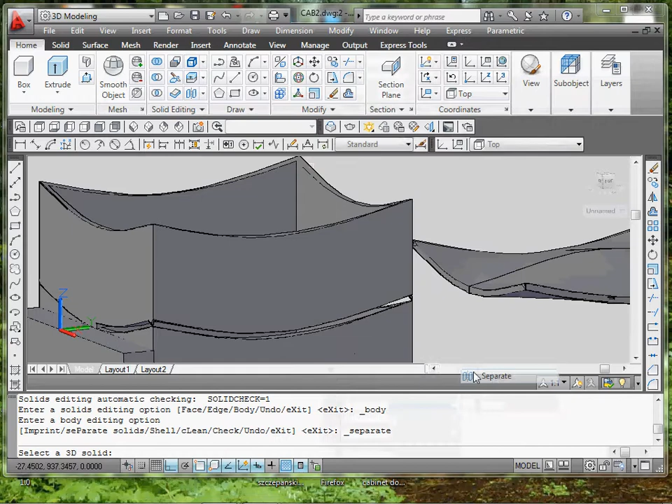That I managed to cut it over here. All I have to do is just use the separate command, go over here, separate, just like that. It should separate into two pieces, which it did.

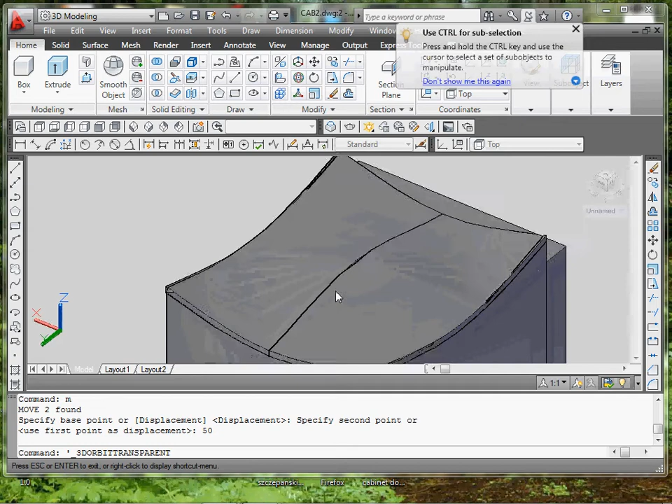I delete it, and I have something like this, which you guys already figured out. Once you have that, you put in the drawer or door you already have completed, and move it back into position. Hopefully you remember what distance.

And I have myself a new custom cabinet. The next step for this would be, if you guys want, you can add shelves, or what we can do is do the door handles. So to do the door handles, I already have some done over here.

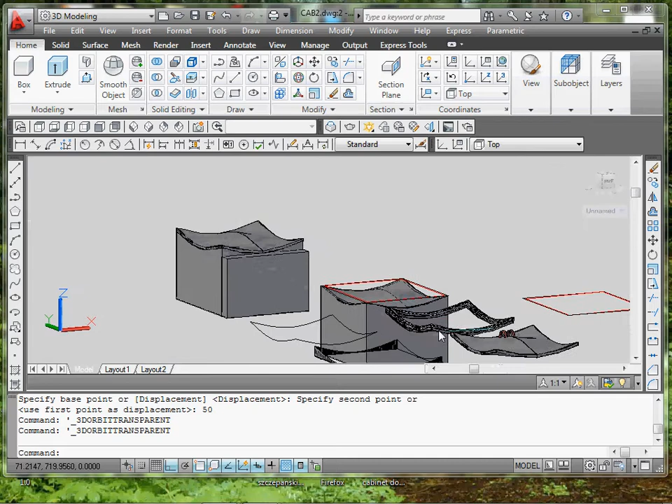I'm just gonna make new ones right now. What we need to do is go to the top view first, figure out how big the handle we want. So I'm gonna draw a rectangle, about 2 inches wide by 4 inches deep, high.

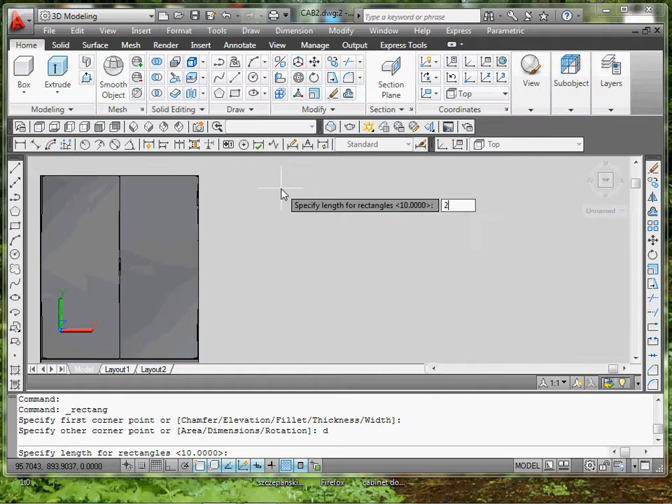So I go rectangle, D, enter, 2 by 4.5. It's really up to you. Make it as big or as small as you want, as long as it works. It can be just a doorknob, for all I care. But that's my rectangle. I'm going to use that as a reference to drawing my handle.

I'm going to explode this to work with it. So I go explode, select the object, explode it.

What I'm going to do next is offset, or type in the distance of the thickness of the actual handle. In this case I used 1/4 inch, or an eighth. Offset 1/4 inch, and I'm going to trace over these two rectangles at the end again.

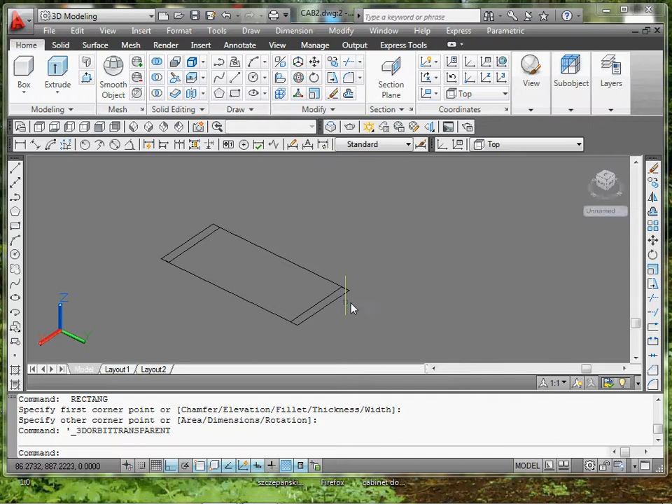So I do have my two solids. I'm going to be lofting from one to the other using a path. All I need to do next is just draw that path. To do that, I'm just going to do what we did with the cabinet.

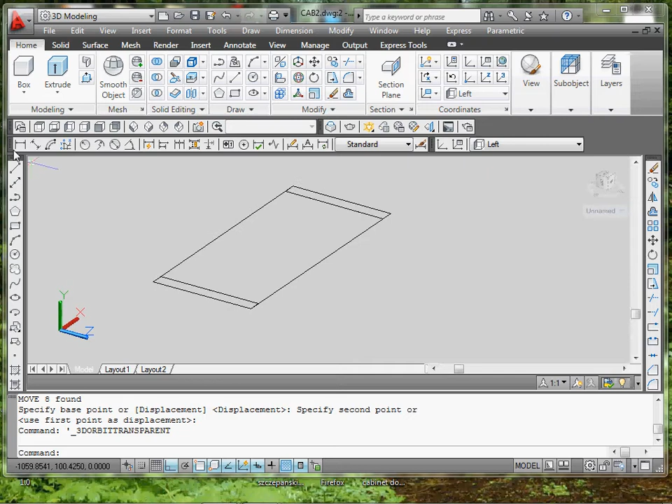I'm going to just move this over so you guys can see it better. I'm going to change my UCS to view it from a left view so I can work easily and establish points of my actual line path that we're going to be using.

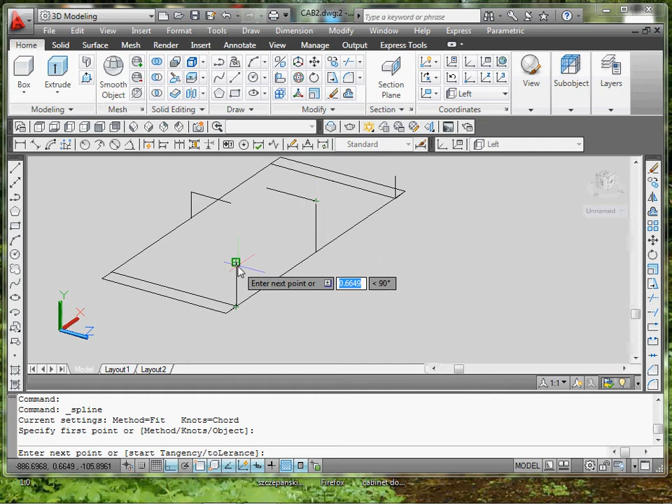So I'm going to actually do both sides. Yeah, that's about fine. Going to use a spline. Start from here, go here, go here, go here. And I'm just going to modify that a little bit by offsetting this point.

There's one line. And I'm going to use another spline, and just do a simple one on this side.

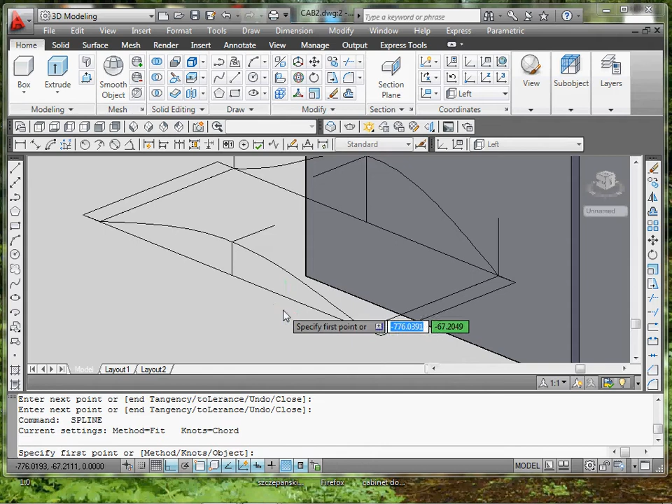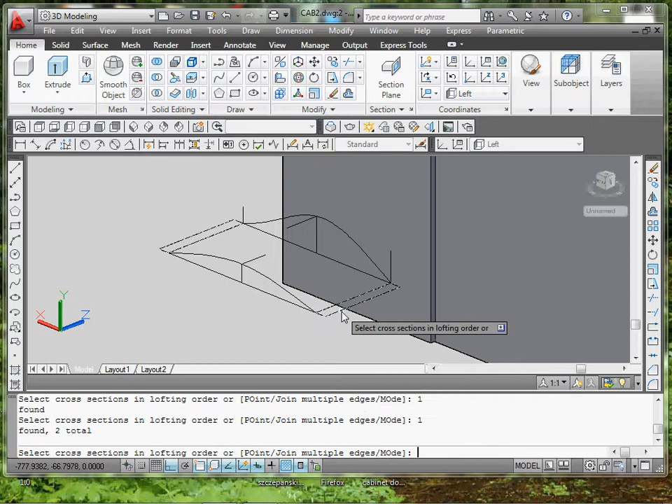Next step is I just need to loft this solid piece to this solid piece. Since there's a line still there, do a blue box and delete it out. Again, loft this to this, enter, guides. There we go. And that's my actual handle.

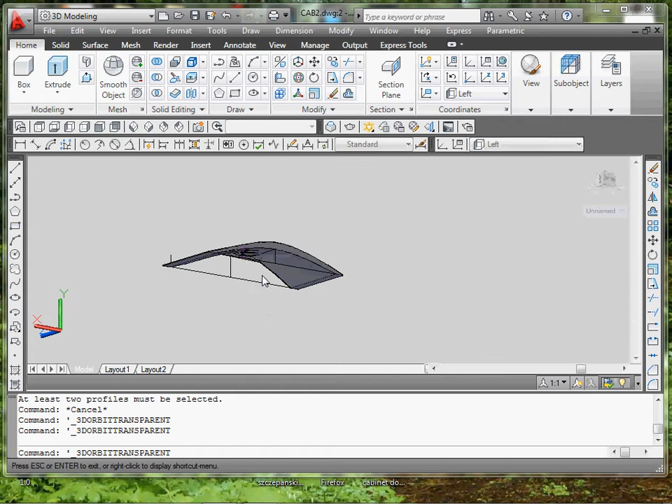It looks kind of dull, flat, not that interesting. I'm going to need to actually extend these endpoints to be extruded out so I can put my fingers underneath. So I can do that right now by going to modify, extrude faces. There we go.

Select this face. Oops, extrude this face, I think I selected it. There we go, and type a distance about that. That didn't work. Alright, do one at a time.

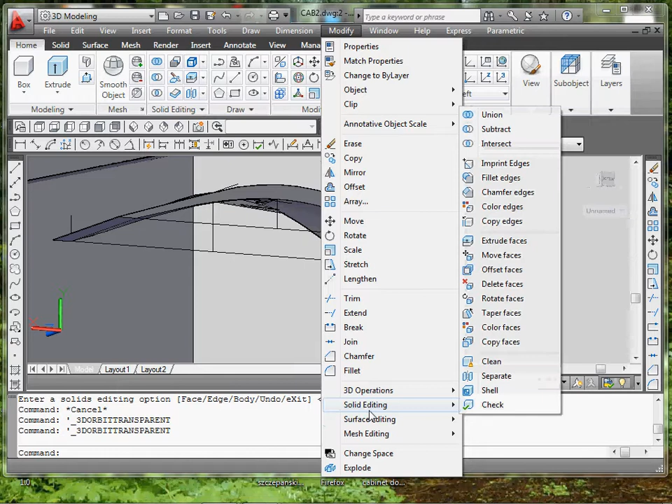Modify solid editing, extrude face. There we go, I'll show type of distance so I can figure it out later. Yeah, you learn from your best mistakes. So select that, enter.

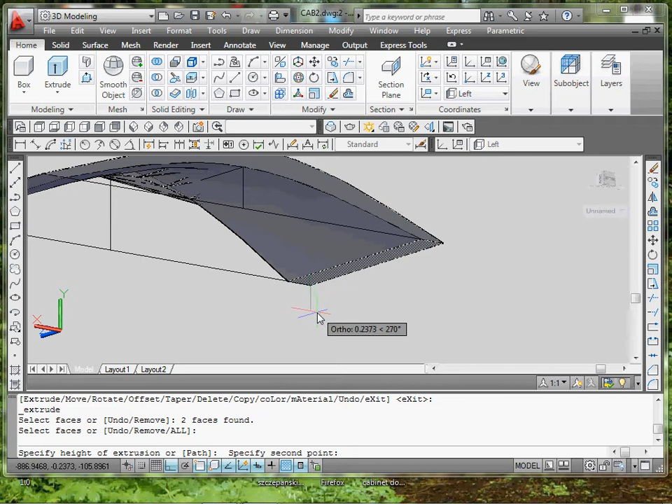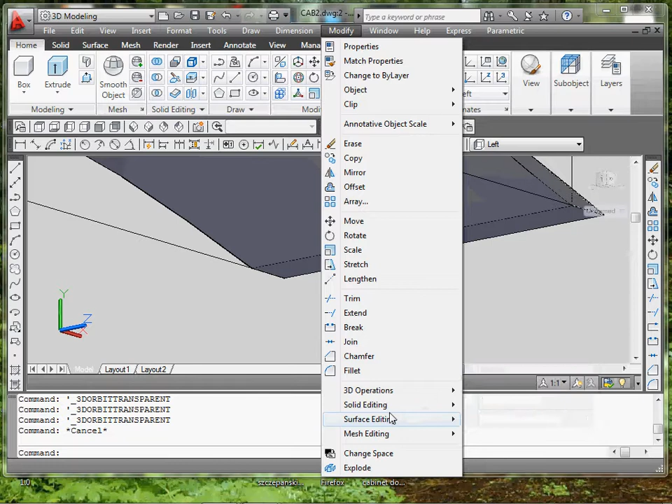So 0.25. And same thing over here. Modify extrude faces. Nope, it's not letting me select it. Let's see if I can get it on the other side. So I can extrude faces. There we go, 0.25.

So I got myself a little better handle. I can put my fingers underneath. But this part isn't as wavy as much as I wanted it to be. So what I can do is, I should have done this before I actually did the handle.

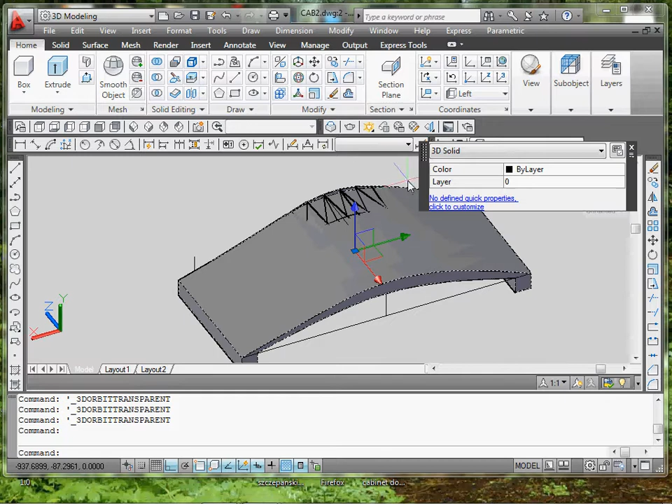That's okay, I'll keep this and I'll make a separate one. I'll work from this one. I'm gonna actually explode it. I should have done this part before, but that's okay.

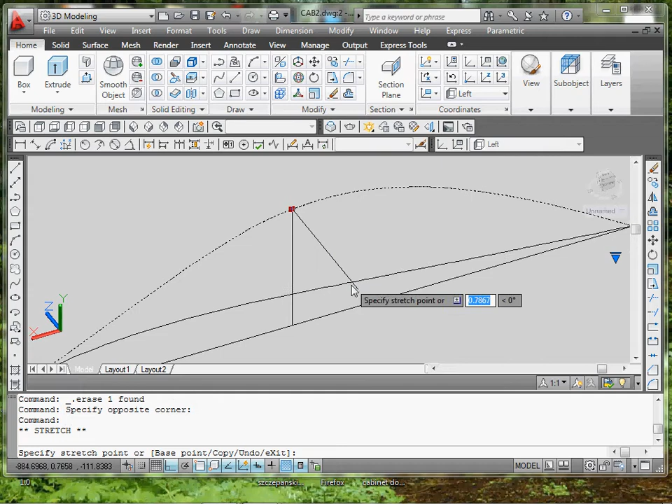And I'm gonna move these over. So this one's gonna be a little bit inward, and this one's gonna be a little bit inward also. I'm gonna make it a little bit easier to grab and more interesting looking.

So again, oh geez, I'm missing the... gotta draw in the rectangle since I lost those. That's an easy fix. That's a 1, 2.

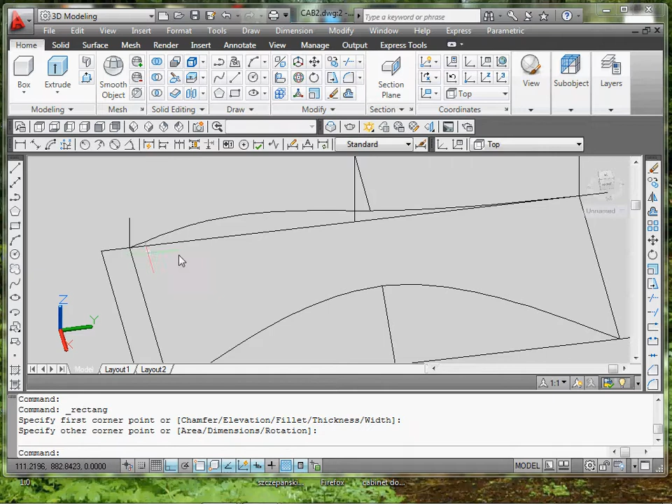There we go. I should make a copy of these so I can extrude them down later instead of using extrude face. So I'm gonna copy these about 5 inches.

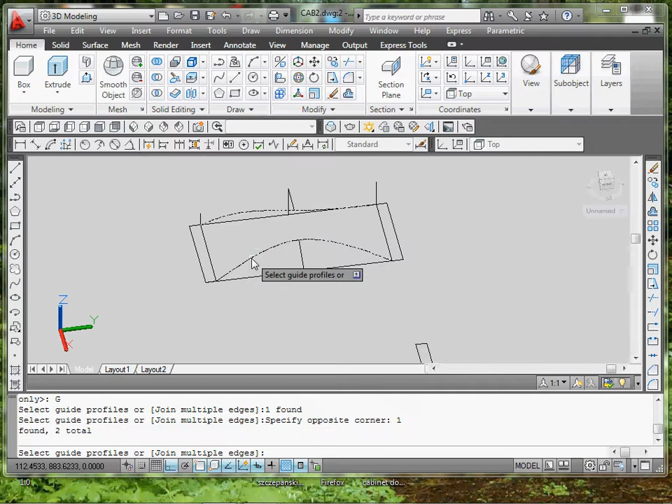There we go. Lofting the solid to solid using my new guides, which is this one and this one. There we go. And I'm gonna move these back, or actually extrude them out now, going downwards by 0.25, moving back 5 inches. And I got myself a completely new design of a handle.

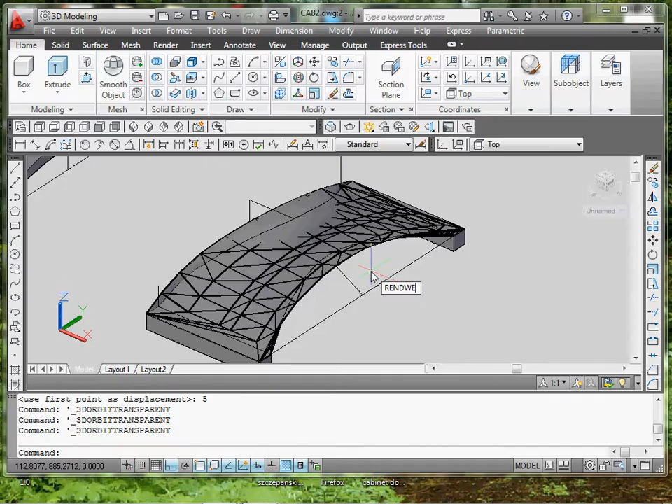The hatching is just reference, I wouldn't worry too much about it. If I render it, it should come out better. Let's see, this is going to be my new handle, that's my old handle. And it comes thin, but that's okay because it's sheet metal, so it's fine. And that's my actual new piece of door handle, which is pretty cool in design.

I can union the bottom pieces to it, which I created, like so. Oops, that was a little weird.

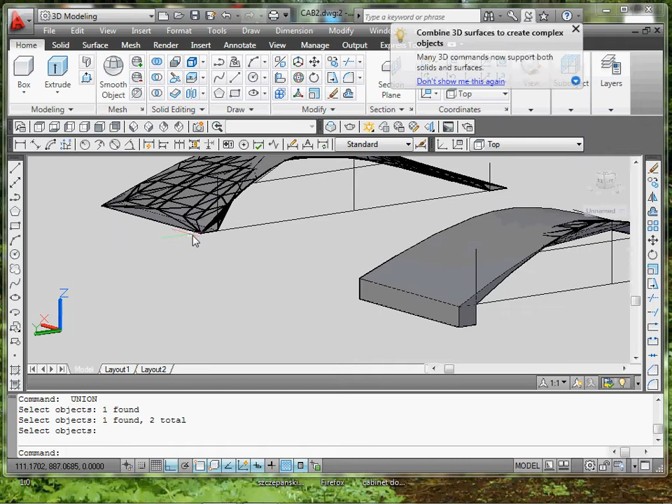That is completely weird, not quite sure why it's doing that. Makes no sense whatsoever. Guess I can try extruding the face. It's not normal. Subtracting instead of adding.

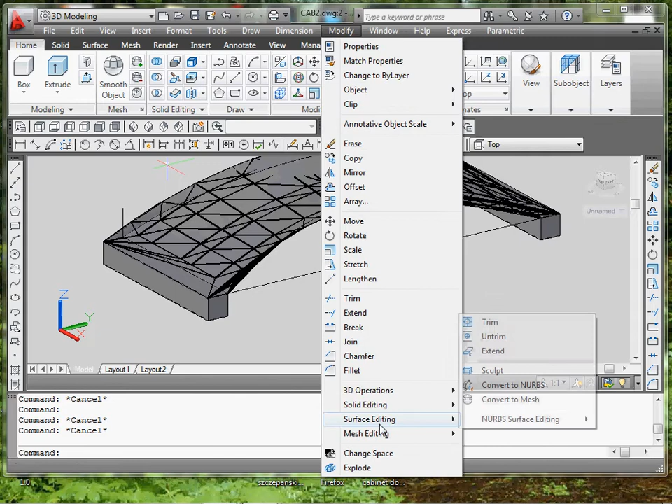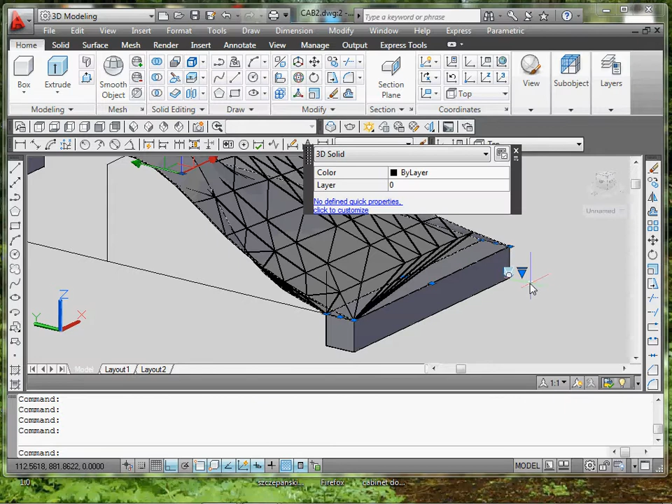Let's see if I can fix this up a little. That's okay. Move this up maybe a little. Fix it.

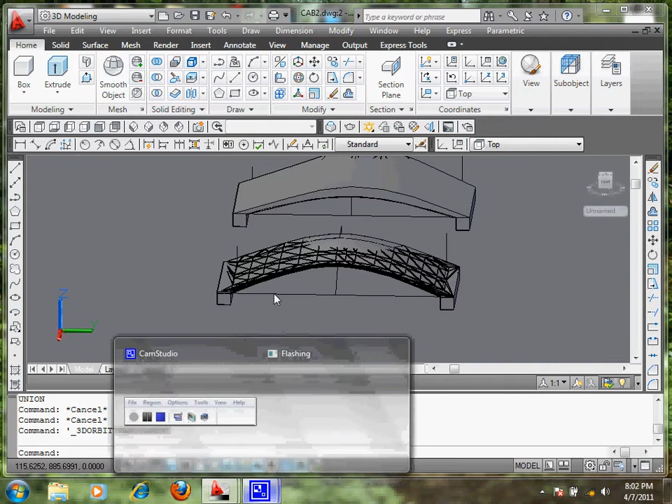Oh, let me just pause this. So I got it to be one piece. Now I just gotta move it into my door.

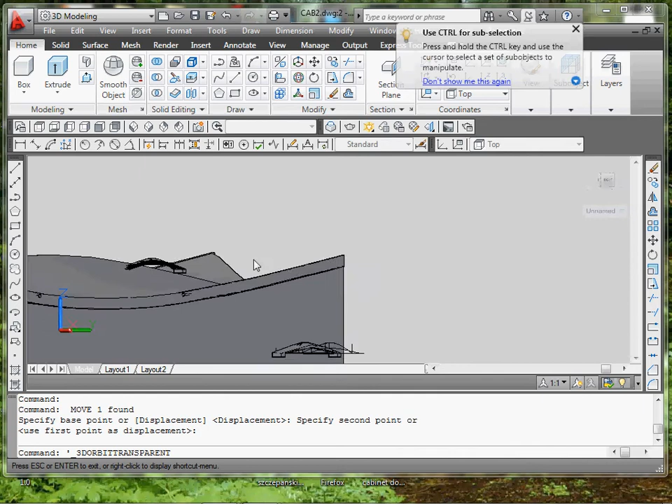And position it, and if I need to I can extrude it out the bottom piece to fit perfectly onto my piece, or I can do a 3D rotate from a specific point.

Oh, that wasn't it. Perfect, okay let's try it again. Select that object, 3D rotate. There we go.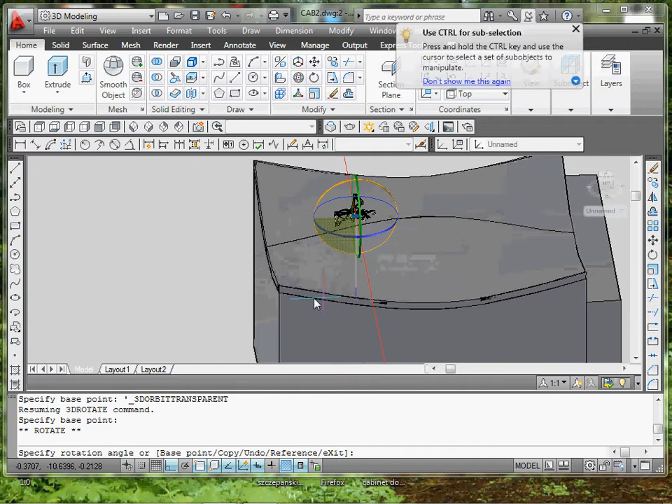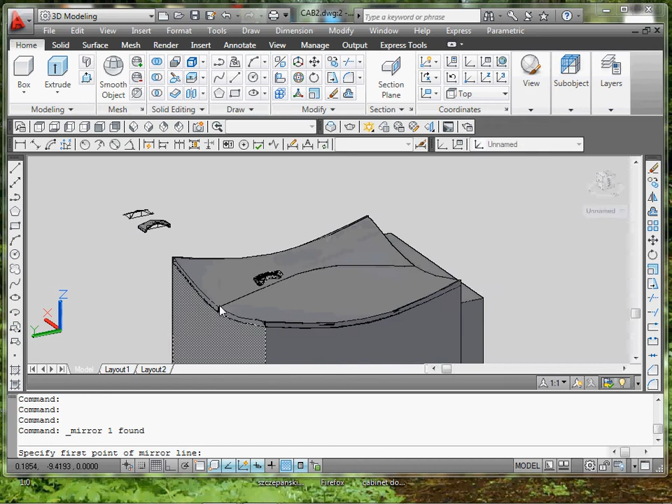Let's turn off all these so I can actually get it to the perfect angle. So something like that. There we go. And just make a mirror. You can get more into depth with this, but I don't want to. If you go top view, select that handle, mirror it.